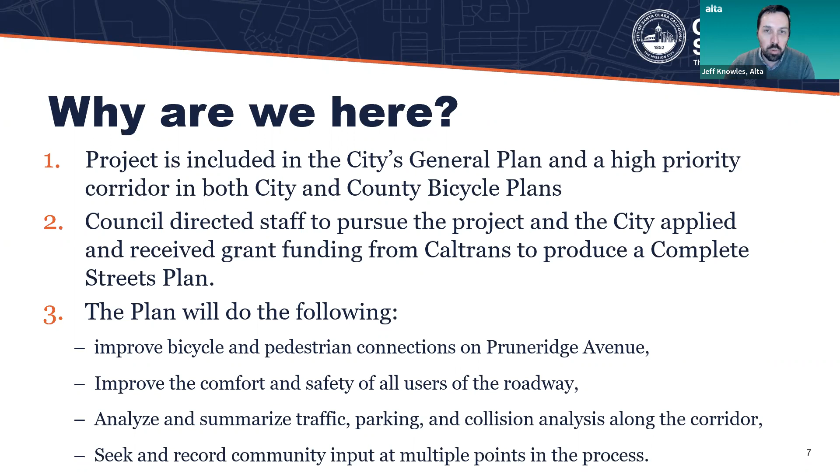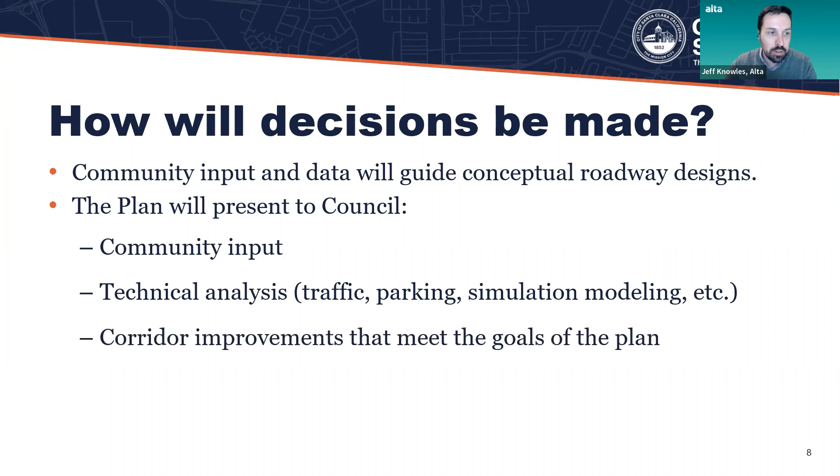We'll be sharing all the technical analysis we're going to share with you today, along with the corridor improvement ideas that help meet the goals of the plan. I think what's most important and clear to understand is that City Council will decide if and how the plan moves forward.

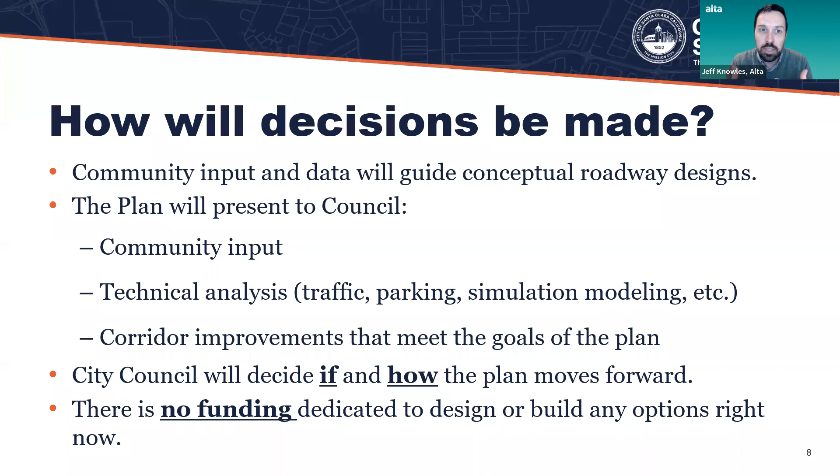To underscore that, there is no funding dedicated to design or build any of these options right now. We're very much at the visioning stage, very early on. There's no money for any construction of these. So we're looking for your input about what the future of Pruneridge could look like. But to reiterate, there's no funding for any of these projects to move forward unless City Council made that a priority and dedicated funding for it.

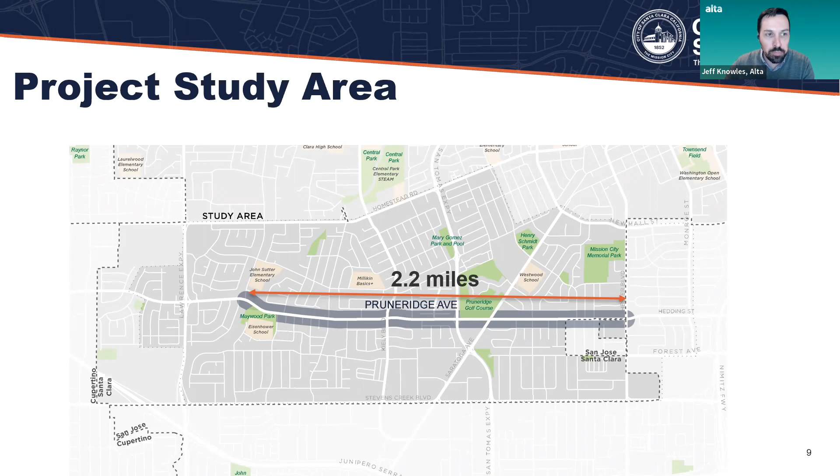So the Pruneridge area - what we're doing is studying a 2.2-mile corridor from Winchester Boulevard, which is your city border with the City of San Jose, all the way to Pomeroy, which is less than a mile from Apple Park, a major employer in the area. And on the east side, you're just 0.3 of a mile from Santana Row, a big retail, shopping, and restaurant district, so you've got good connectivity there.

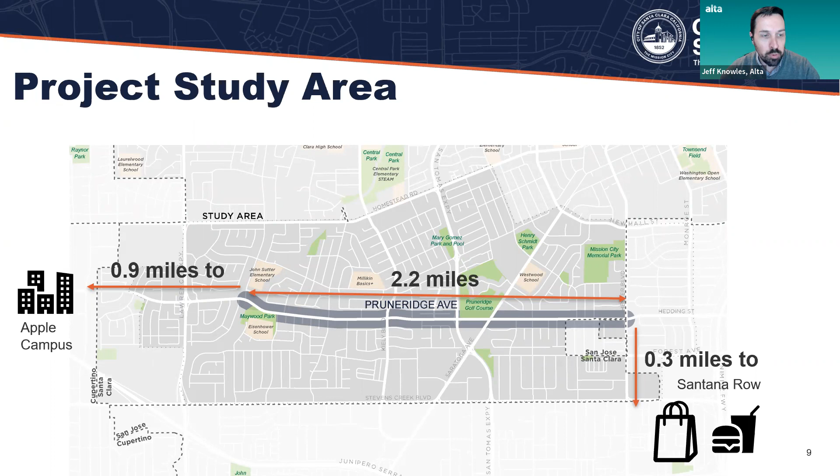It's also the area bounded by where there has already been a road reconstruction. So there are 3 lanes in each direction on Stevens Creek, which is what Pruneridge becomes in San Jose, and then there are 3 lanes on Pruneridge from Pomeroy over to Tantau.

Where are we in the project schedule? This project kicked off last winter. We had 2 rounds of community workshops, where we were gathering information, listening to people's preferences, getting their visions and ideas for the corridor. Then over the spring and summer, we started to put that information into roadway concepts, shared them out with the public, and did 2 more rounds of workshops.

Over the fall and winter, we've revised those roadway concepts based on the input we received, and I'll be ready to share that tonight. We've also looked at pedestrian improvements, which is something we did not look at in detail earlier on, so we've gone back and evaluated opportunities to make it easier to walk. From here, we'll take this input and revise it, putting it into a public draft for council and the public to review again before council makes a decision.

So activities completed to date: that first phase of community engagement included 7,000 postcards going out to everybody within a half-mile of the corridor, holding 2 workshops, having an online survey, and meeting with the Bicycle and Pedestrian Advisory Committee.

We also held 5 stakeholder meetings with businesses and civic organizations around Pruneridge Avenue. We developed our draft corridor concepts, held our second round of community engagement, and analyzed the existing and conceptual corridor analyses to understand the impacts each concept would have on traffic, parking, and congestion. We refined the corridor concepts and presented them first to the BPAC and then to the public last Wednesday night. So what did we hear?

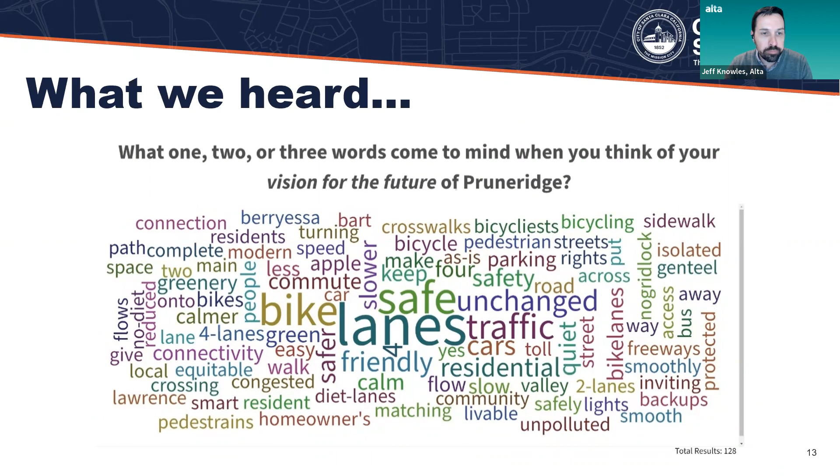Then we said, close your eyes and imagine what Pruneridge could be in the future. If you had a chance to change things, what would you like to see? We asked people to pick 1, 2, or 3 words. We see safe, bike lanes. Some people said unchanged, slower, no gridlock—these are some of the words I'm just pulling out here.

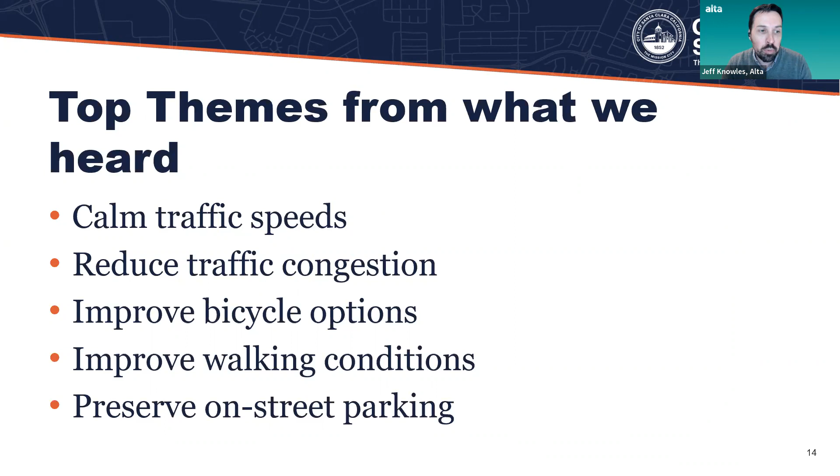All of that boiled down into a couple of themes we heard pretty loud and clear. One is that people wanted to see Pruneridge have slower, calmer traffic speeds. Folks also mentioned a lot of concerns about traffic congestion during the AM and PM peak periods. We heard that people wanted to improve bicycling options and walking conditions, and also heard pretty clearly that people wanted to preserve the on-street parking options.

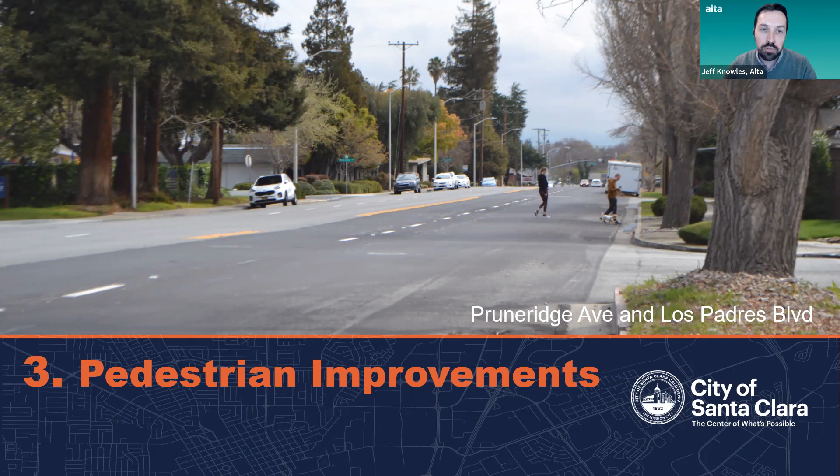All of that informed the work we did in coming up with these ideas, these concepts. I want to start first by talking about the pedestrian improvements. These improvements come directly from the city's pedestrian master plan, which looked comprehensively at where the city could make improvements for crossing the street or walking along streets to get to destinations. So these are the tools we have that come directly from that master plan process.

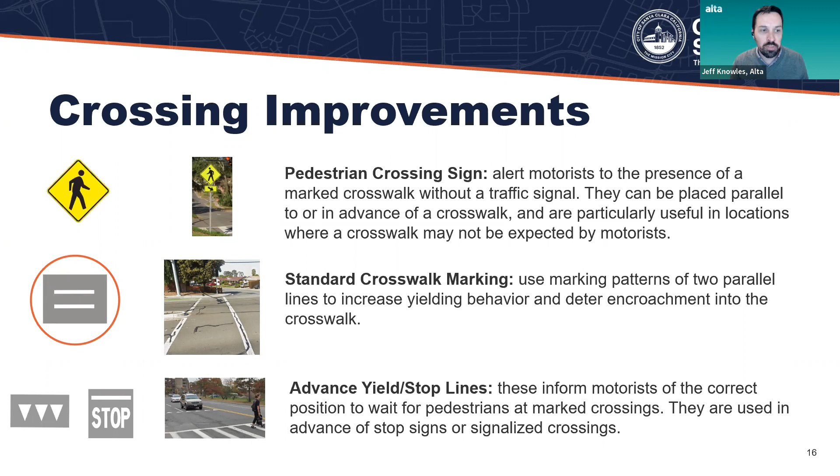We have features and elements like the pedestrian crossing sign to alert motorists where crosswalks are located. We have markings like standard crosswalk markings, the 2 white lines you see here. You have advanced yield lines and stop bars—these advanced yield lines are these triangles. That's just to let drivers know they should not park or stop right on a crosswalk; you want to set back. That gives more visibility for people crossing the street.

We looked at opportunities to improve ADA curb ramps for people who need wheelchairs, walkers, or strollers. We also looked at opportunities to reduce the curb radius—basically making it so cars need to slow down more when making turns. When you have these wide sweeping turns, you can take those at high speeds, which can create more conflict and collisions with people walking. So we've looked for opportunities to tighten that up a little and shorten the crossing distance.

We've looked at opportunities to improve right turn slip lanes. If you think about where those are located, at Saratoga and San Tomas Expressway, that's where you have the right turn slip lane that doesn't have a signal, and you can take those again at pretty high speeds. It becomes a bit of a conflict point for people walking, so there are different designs you can do to slow those down.

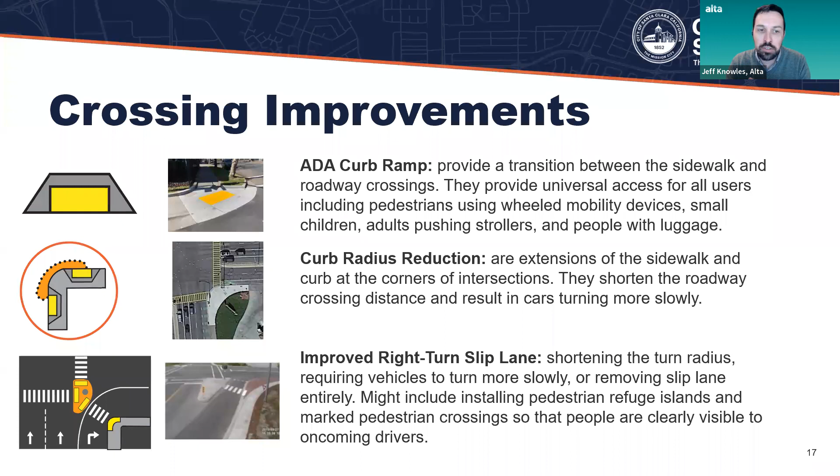Finally, we looked at opportunities to add countdown timers for pedestrians, along with accessible pedestrian signals—devices that communicate walk or don't walk for people with visual impairments. Finally, we looked at opportunities for traffic studies at intersections that might need stop control, stop signs, other signals, or beacons, which would require a little more data than we could collect in this process.

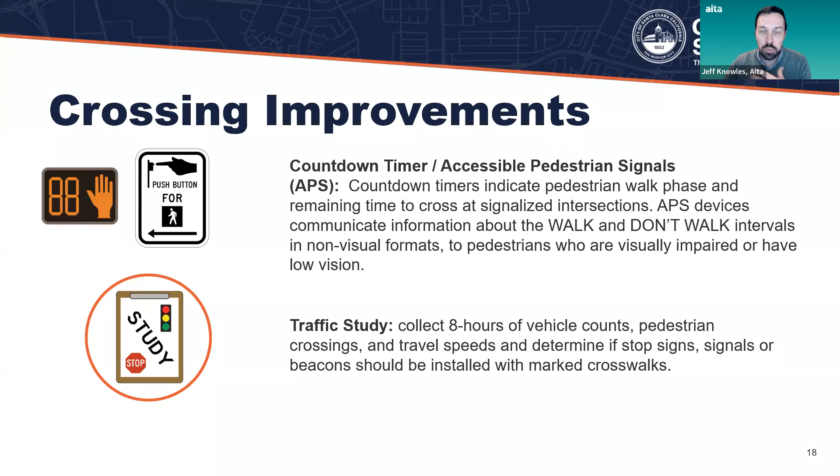So I'm not going to go through every intersection, but I will note we've got ideas for improvements at each of these. The slideshow will be posted on the project website, and we'll also email it out to anybody that registered for this meeting tonight.

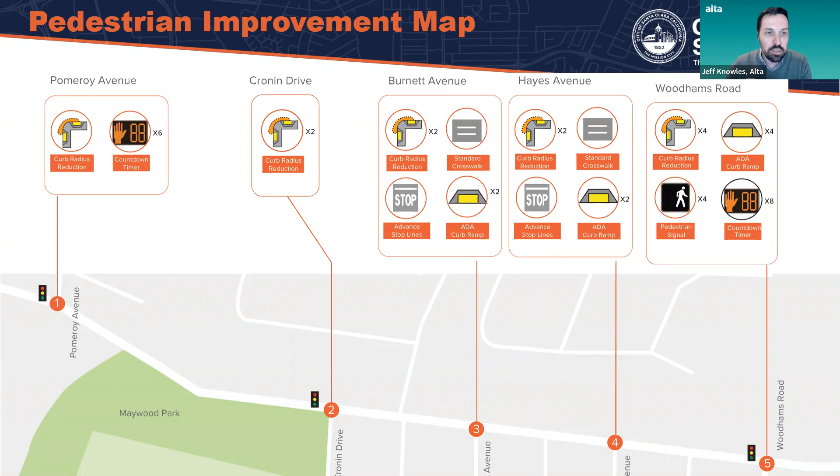So you can see those icons match up with these icons that I've shared with you here, and you can kind of see at each intersection. So at Pomeroy, we're recommending reducing that curb radius and adding a countdown timer on at least one of those legs. We've got these for all the way through Redwood and Cedar Way.

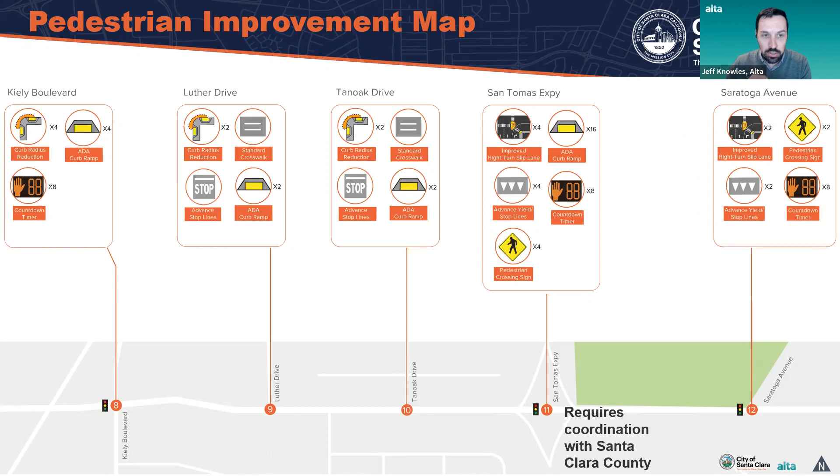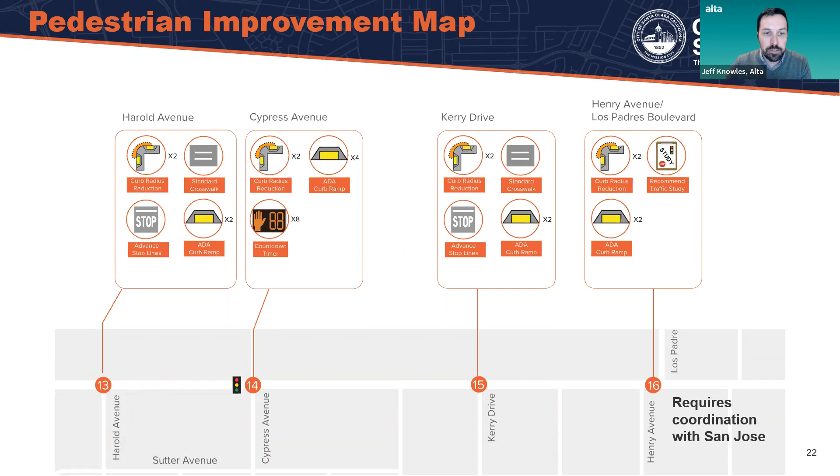We've also noted some that will require more coordination, such as San Tomas Expressway, which is not really under the control of the city, it's managed by the county. So you have to work with Santa Clara County for any changes there. There also are portions of this corridor that are within the city of San Jose's jurisdiction on the south side of Pruneridge Avenue, starting around Henry Avenue all the way to Winchester. So you can see those here as well.

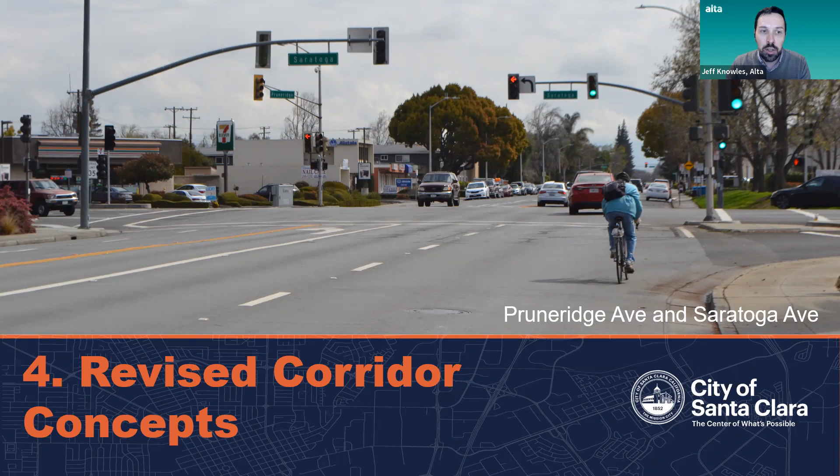In terms of the corridor concepts, if you're new to this project, I'm going to go through those in a little more detail. We've presented these previously to the public and heard some clear concerns about what we presented, and we've identified some revisions to those.

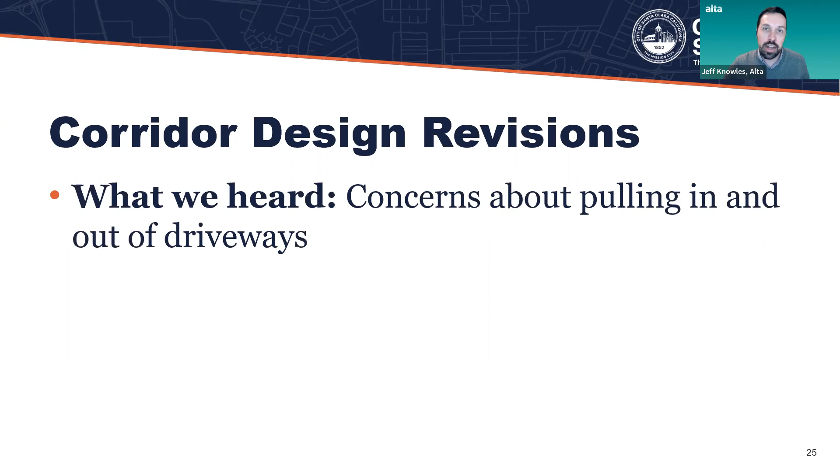So one thing we heard in the last round was concerns from residents who live directly on Pruneridge about getting in and out of driveways. So we've come up with driveway sightline buffers - I'll point those out in the concepts in a second. I also heard it's unclear where trash receptacles should be located, so we've identified where those could be picked up, where you could store your trash receptacles on pickup days.

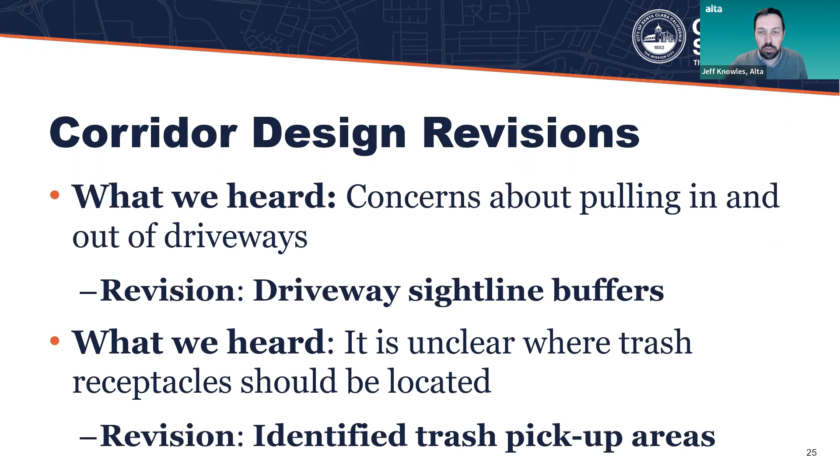The first concept that we shared previously is this 4-lane option. So a couple things to point out here: instead of those 12-foot travel lanes, we would reduce those and narrow them down to 11 feet for the inside lanes and 10 feet for the outside lanes. That has a benefit of helping calm traffic and slow it down. Then to fit in a buffered bicycle lane, which you can see here is 5 feet wide with a 2-foot painted buffer, this concept 1 would require removing parking on one side of the street. And we're not here to say which side of the street, but I'll get into more detailed analysis in a minute here about what that would mean in terms of impacts.

Some other things to point out with these concepts is, as you can see in blue, the curb radius reduction or the curb extensions. That provides additional visibility for people crossing the street and slows down traffic from making those turns so they can do it at a safer speed.

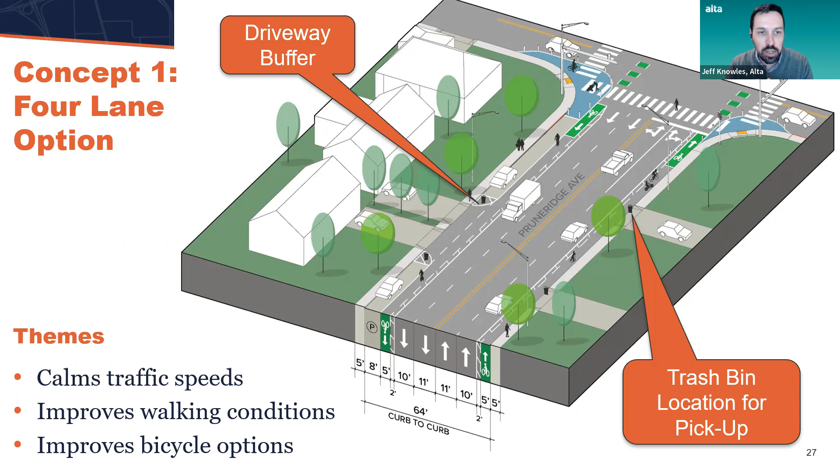In terms of new features, you can see here at the corners, at driveway corners, we've added driveway buffers, so it's painted space where people would not park. This gives a little more visibility for people getting in and out of the driveways. These also provide opportunities for people to put their trash bins out on trash pickup days in those sightline buffer areas. And on the street side that would lose parking, those would need to stay on the sidewalks.

The second option is called the 2-lane option. This would take your 2 travel lanes in each direction and take it down to 1 travel lane in each direction and add a 2-way center turn lane down the middle. The benefit of this is that people getting in and out of their driveways, instead of having to turn left across 2 lanes of traffic and try and find the gap, this allows them to move out of the traffic, wait for that gap, and cross only 1 lane in the opposing direction. So it's a safer orientation.

Also, the lanes would be narrowed down to 11 feet and 10 feet for that center turn lane, so there's some traffic calming, speed calming built into the design. The feature of this would also be preserving on-street parking on each side of the street and getting in those buffers. There would be a little bit more buffer space, 5 feet, and then the 3-foot painted buffer. And in terms of the intersections, same as before, there'd be the curb radius reduction to make it easier for people that are walking to cross the street. On both sides of the street, you have the trash bin locations for pickup within those driveway buffer areas.

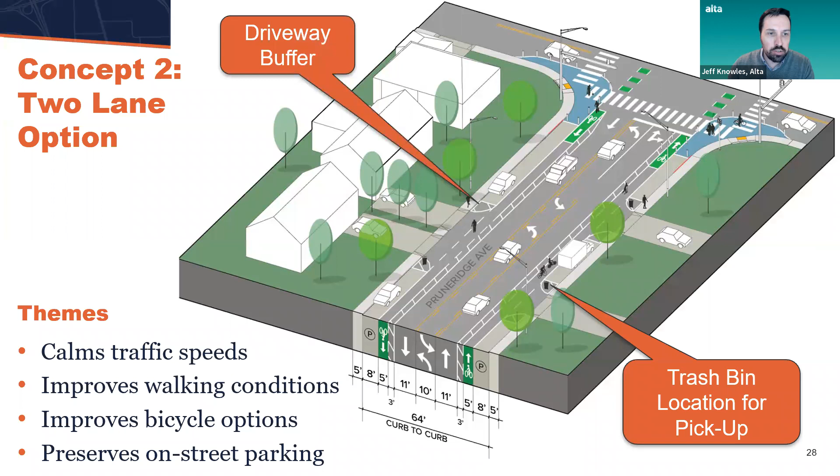And then the third concept is what we've called the parking protected option. It's very similar to concept 2 that I just showed, but you're flipping the bike lane and the parking lane. So now you have the sidewalk, then the bicycle lane, a 3-foot painted buffer, and then you have your parked cars floating in a parking lane before you get to the travel lanes. Same dimensions as before in terms of the travel lanes, and a little bit more space at the intersections here.

I will mention that in addition to the parked cars in that buffer space, not blocking the driveways, there would be some sort of vertical element, and we haven't decided what that would be. That would be later stages of design to figure out, but it could be bollards, curb stops, a planted median - a lot of different features and looks and feels. So there would be additional physical barrier. This concept appeals most to young kids, novices, maybe older folks bicycling, because it gets that extra protection between them and high-speed motor vehicles.

And again, the driveway buffer, you can see that here, making it easier for people to get in and out of driveways, and also providing opportunities for storing the trash bins for pickup.

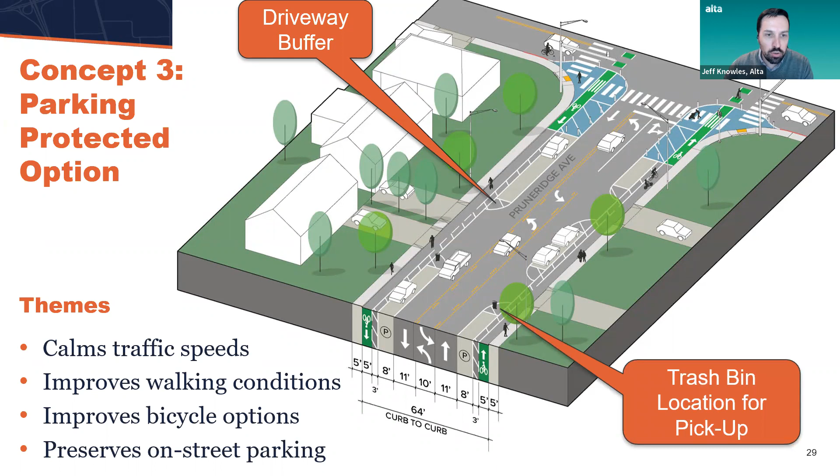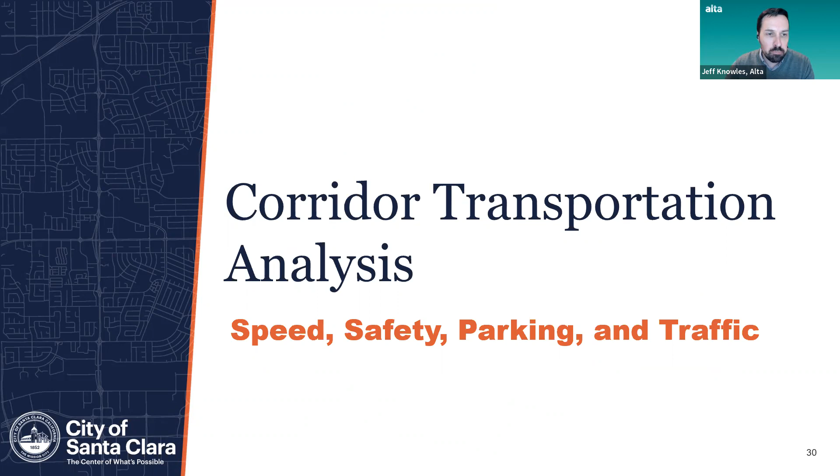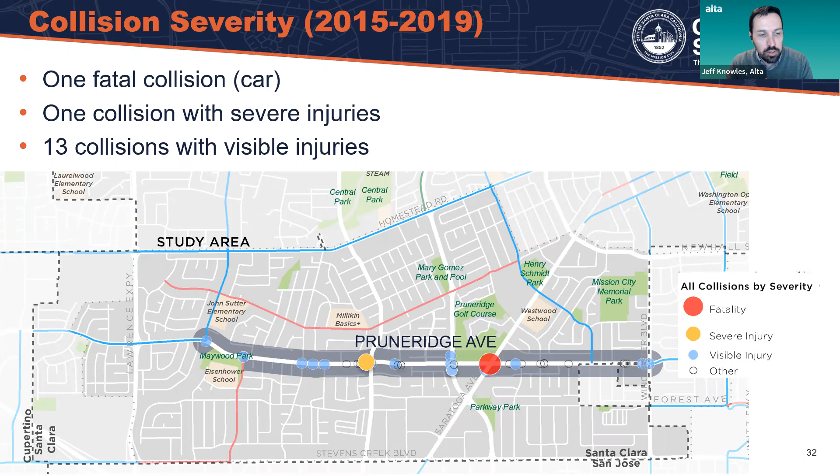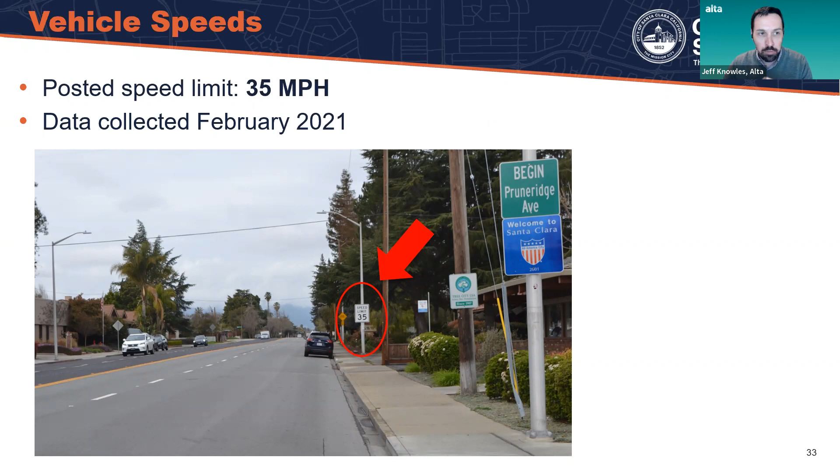Posted speed limit is 35 miles per hour. We collected speed survey information in February of 2021. And what I'll point out is that in February 2021, there was a lockdown in place, so the volumes, the number of people out on the roads, were down, and nationally speeds went up - with fewer cars out there obstructing you, you can travel at higher rates. And we definitely saw that. So these numbers may be more than a typical day after COVID. I just want to make sure that's clear when I report this information.

That being said, the numbers we collected support what we heard from the public before, that people are moving at higher rates of speed, certainly during non-AM and PM peak hours. 44% of drivers were exceeding the speed limit between Pomeroy and Kiely. They weren't going too much further than that - 85% of drivers were below 39 miles per hour. So yes, speeding, but we're not seeing incredibly high rates. There aren't a lot of people going 60 on Pruneridge, but even still, we know that 35 miles per hour can be deadly and lead to severe collisions.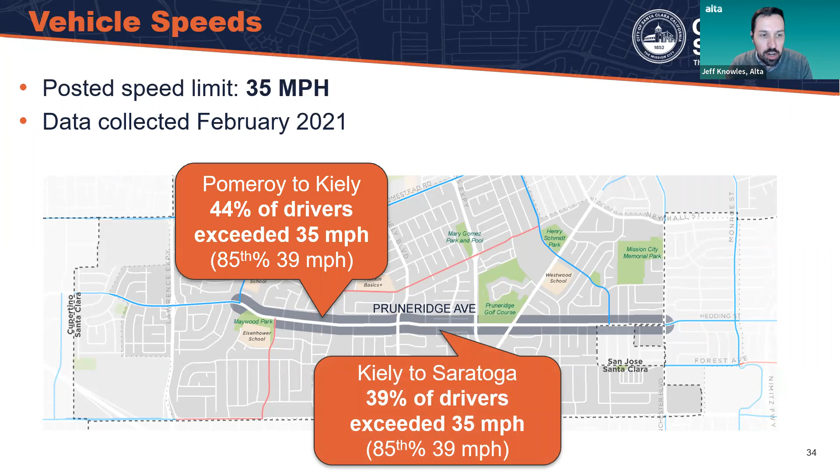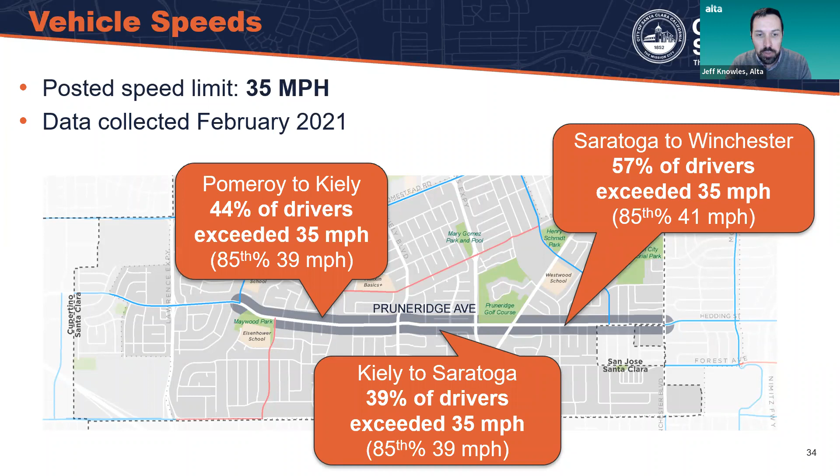39% of drivers exceeded 35 miles per hour with a speed limit between Kiely and Saratoga. Still, the majority are below 40 miles per hour. The area where we see the highest rates of speeding is between Saratoga and Winchester - 57% of drivers, when we collected information over several days, were going above the speed limit, and the majority were below 41 miles per hour. This, I think, is attributable to the fact that there are very few stops or signals between Saratoga and Winchester. So the way the road is designed feels like you should travel at higher rates of speed.

So what does this information tell us about each of the concepts? The first, no-build option, keeping the street as it is, would not have any potential collision reduction or speed reduction factors. If you went with the 4-lane option, which has lane narrowing, we don't have enough research nationally to talk about what that would do for collision reduction, but we do know that potential speed reduction would go down between 1 and 6 miles per hour just by narrowing the travel lanes.

If you go with concept 2, the 2-lane option, you get the lane narrowing plus reconfiguring the roadway. From the Federal Highway Administration, which has done extensive national study of this over the last 25 years, they've reported those streets that do this reconfiguration see between a 19 and 47% crash reduction, along with the narrowing travel lanes getting 3 to 6 miles per hour slower.

On top of that, the parking protected option, concept 3, you get the lane narrowing, the reconfiguration, and the bicycle protection. That bicycle protection we're not seeing yet reported on - it's a relatively new design, and we've not seen enough national research to report back on the collision reduction for bicyclists, but you get the same benefits as concept 2.

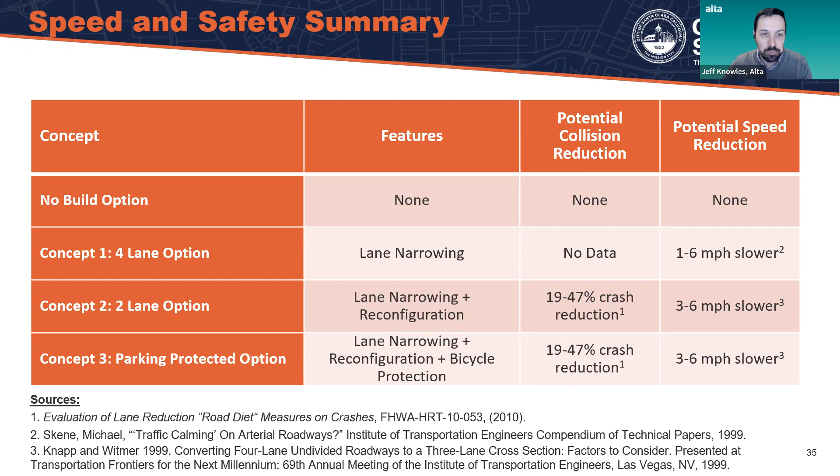We looked also at what road reconfiguration did in terms of collisions on either side of Pruneridge Avenue. First we looked at the road reconfiguration from Tantau to Pomeroy. This is what the street looked like before - very similar, almost exactly identical to our study corridor. After the road reconfiguration went in, the city saw a 15% collision reduction.

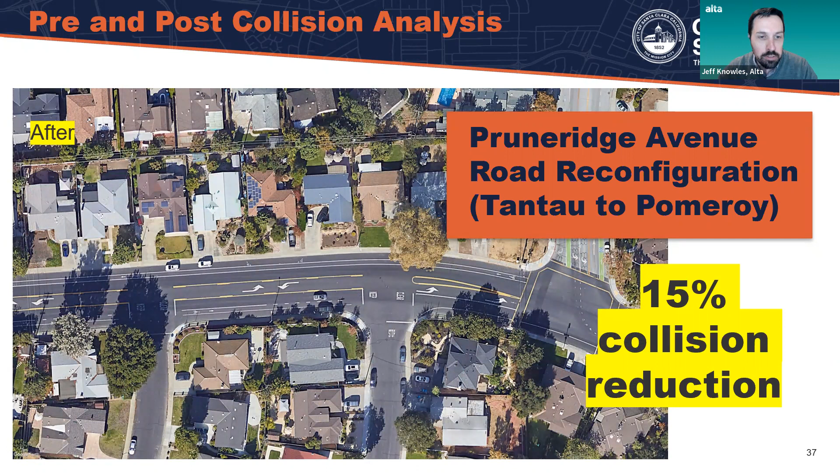On West Hedding in the city of San Jose, the north-south street here that's not labeled as Winchester Boulevard - at the very beginning of our corridor study, this is how it looked before: again, very identical, 2 lanes in each direction. After the reconfiguration, the city of San Jose reported a 33% collision reduction in the years before versus the same period after.

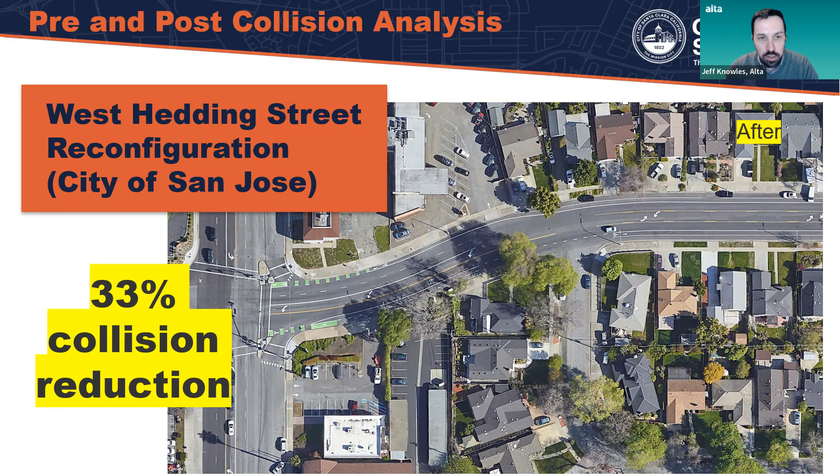Parking analysis. So we did a really exhaustive parking analysis. We took parking counts on both sides of Pruneridge Avenue from and including Pomeroy all the way to and including Winchester. We did these in March of 2021, during lockdown during COVID, so we could probably assume that this is the highest demand for on-street parking when people were not traveling to jobs. We took parking counts at multiple times during the day.

We did block-long counts on all of the side streets on both sides of Pruneridge, conducted during 3 weekdays. Each of those weekdays we conducted it at 7 to 9 a.m., then again at 11 to 2 p.m., and we did counts between 2 a.m. and 4 a.m. to figure out the overnight needs. We came back on a Saturday and did it also in 2 time periods, between 11 and 2 and 5 and 8. So what the data I'm presenting here is the average utilization across those time periods.

We have detailed maps for each of those time periods if the staff or the public would like to see them as well. So really what this utilization understanding helps us with is concept 1, which would require the removal of on-street parking. From this information you can see here that there are 220 available parking spaces on the north side of Pruneridge. What we observed on average is that 43 cars are using those spaces.

And so you have a utilization rate of 19%. We have more spaces available on the south side, 233, with an average of 38 observed, so 16%. So on average, about 18%, or 8 out of 10 parking spaces available during a period which we think would have the highest demand for parking.

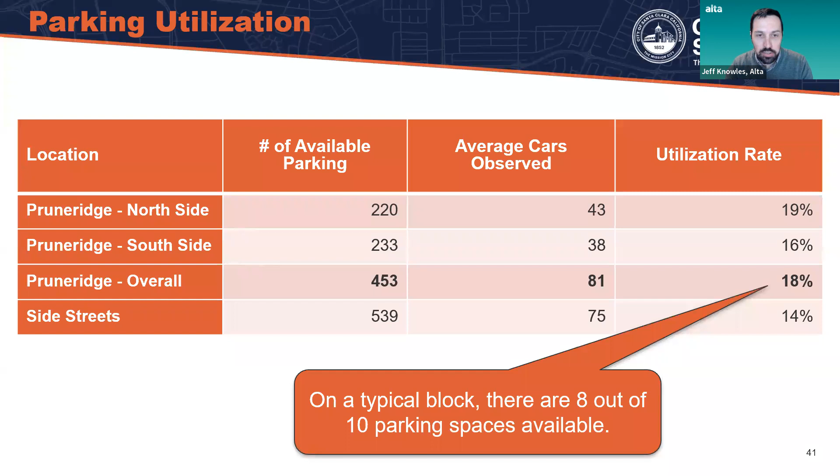Shown graphically here in the navy, this is blocks on side streets as well as on either side of Pruneridge that have greater than 50% of the available on-street parking available. The lighter blue is between 30 and 50%, yellow is 15 to 30%, and anything in red is less than 15%, or heavily parked up with not available parking spaces.

So you can see here on average what it looks like. Taking out some example blocks: Radcliffe to Woodhams, 5 out of 36 available spots are used. The area where we see a little bit more use is Saratoga to Cypress on the north side, 17 out of 28 spaces used, but still available on the side streets and across the street. Then this area from Saratoga to Harold, in front of the Sportsman Lounge or the laundromat, 12 out of 15 spaces are used here.

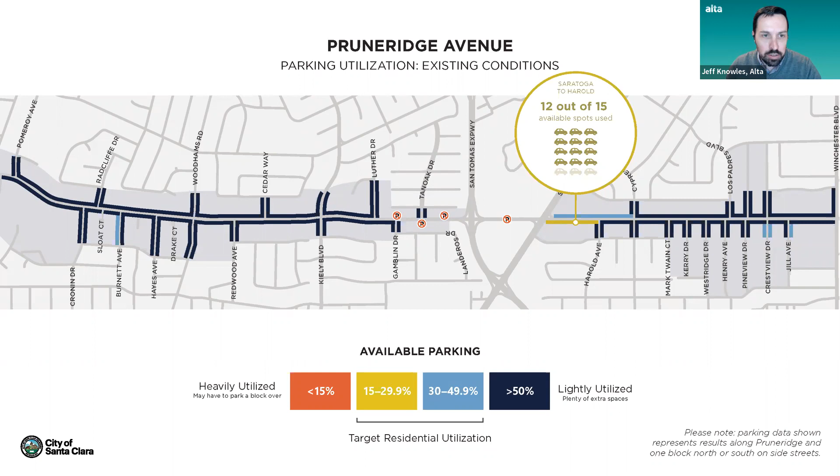We did not count whether people were fully utilizing the off-street parking lots that are here, and then across the street, the 7-Eleven and the shops across the street. So what would happen if parking were removed on the north side of the street and consolidated?

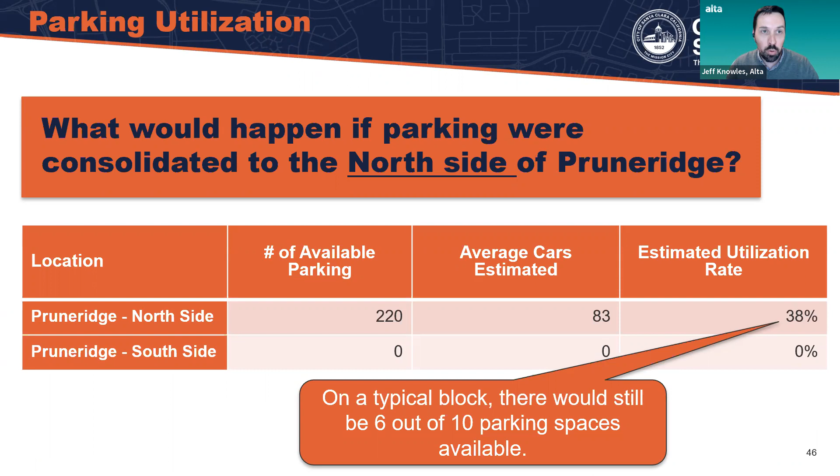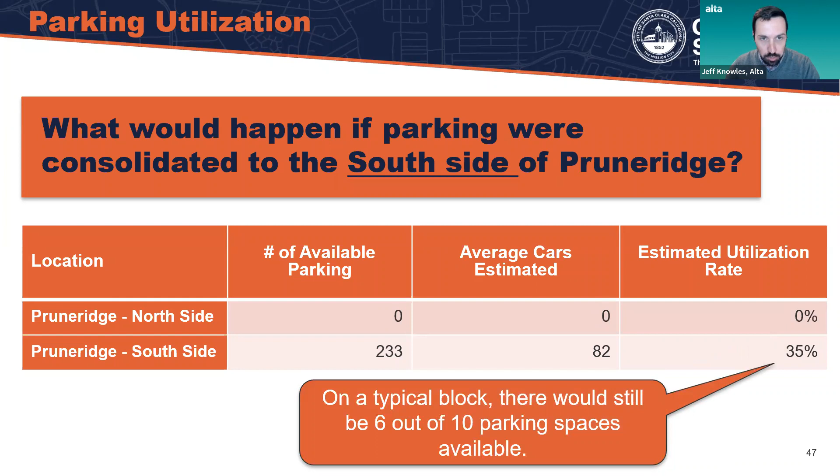On a typical block, there would still be 6 out of 10 parking spaces available, assuming that everybody would park across the street instead of using the side streets, which could also accommodate all of the available parking needs. On the south side, again, 6 out of 10, or 35% utilization. So there'd still be plenty of parking spaces available if the city pursued Concept 1.

Traffic analysis. I'm going to get into a little bit more information here. We started our traffic analysis by collecting turning movements, or intersection counts, for bicycles, pedestrians, and vehicles at 25 locations. We collected all of that on a midweek day in February of 2021, so during COVID. I'll get into a little bit more about how we corrected for that, because volumes were lower than typical, and we've factored that in.

Intersections are evaluated using the city's transportation analysis policy, using level of service, or LOS, which evaluates the operations or congestion people would face at different intersections. They're scored A through F. Don't think of this like grade school, where A is what we should all strive for and F means you flunked. An A could mean the street is overbuilt and cars are going at very high speeds. In its general plan, the city sets out goals for acceptable operational values, and those are between an A and a D. So if you get an A, B, C, or D, you're meeting the city's goals. They also make exceptions for San Tomas Expressway, where E is also acceptable on these major expressways. F is unacceptable anywhere, and E is not meeting the goals on city streets.

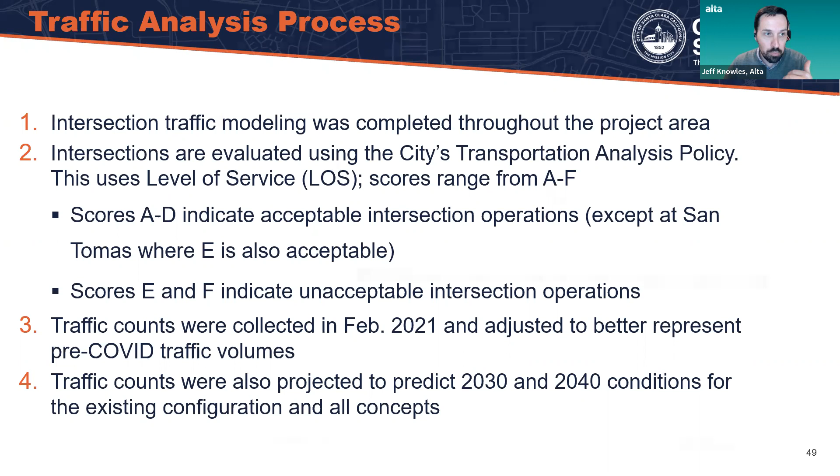I mentioned the 25 study intersections. 12 of them are along Pruneridge, 5 are on Forbes, 5 on Homestead, and 3 on Mauricia.

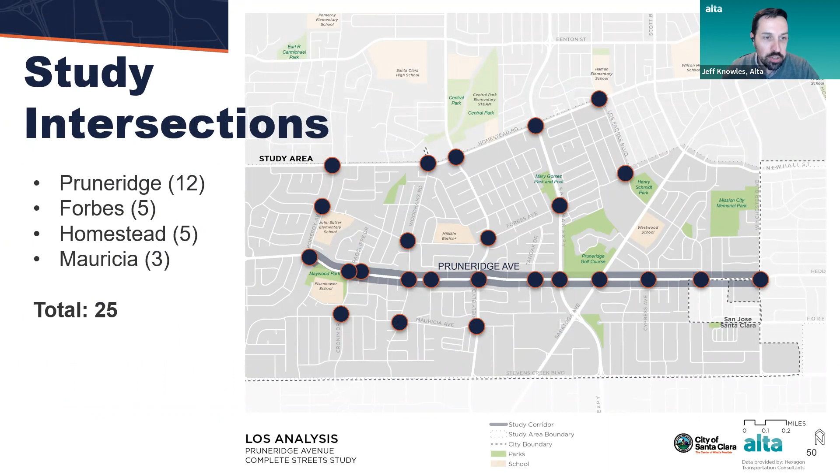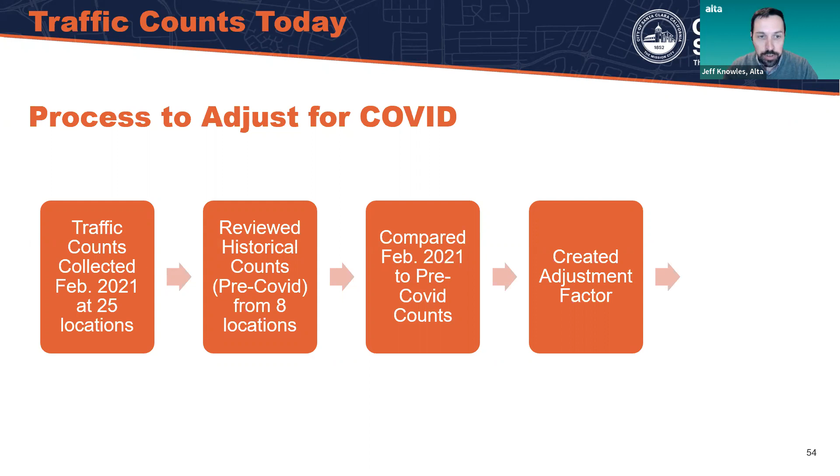We started by collecting those counts during COVID at 25 locations, and then we reviewed historical counts. We have 8 locations, 4 of them on Pruneridge, from before COVID, in the years right before, 2018 and 2019, so pretty fresh information about driving volumes along Pruneridge. We compared the counts we took to the counts we had and created an adjustment factor, looking at how many fewer cars are traveling compared to pre-COVID. That's the average we used to bump up all of our count numbers. I'll show you what that looks like here.

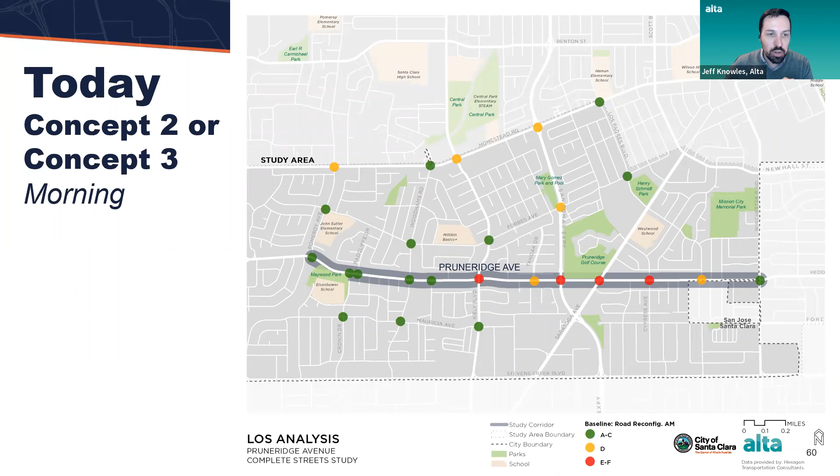With concepts 2 and 3, you can see how those shift down and create issues at Cypress, at Saratoga, at San Tomas Expressway as before, and at Kiely.

In the evening, a very similar situation. With concepts 2 and 3, you can see issues at San Tomas, at Tan Oak, and at Kiely.

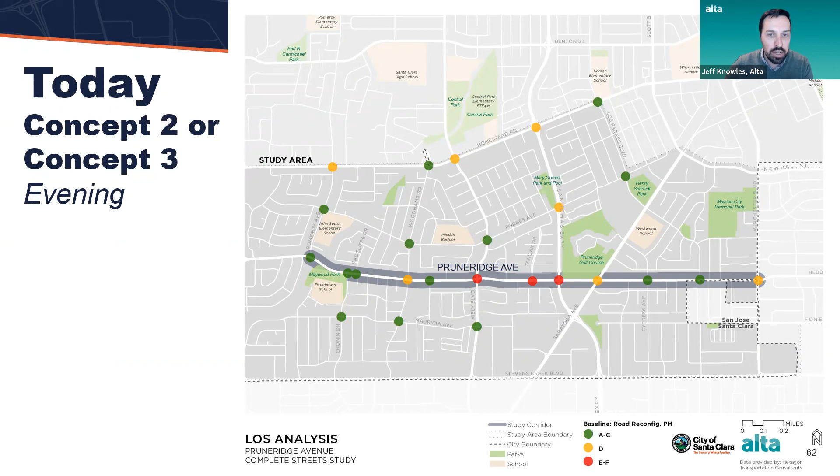In the year 2030, we expect 18% higher traffic volumes than today. The current no-build option, or concept 1, which are identical in terms of traffic impacts of doing nothing, would see 3 intersections not meeting the goals: San Tomas Expressway, Pomeroy and Homestead, and Kiely and Homestead. That could be due to other factors at play, which the city will look at in terms of ways to mitigate or reduce those impacts.

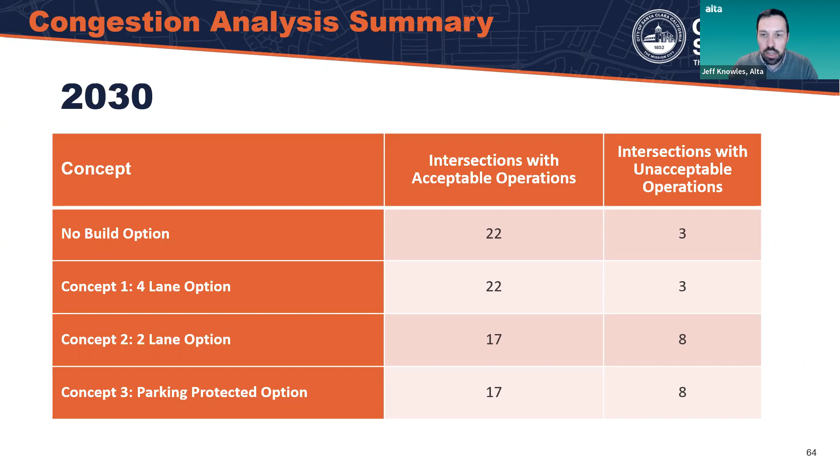In addition, you'd get a couple more intersections not meeting the goals on concepts 2 and 3. Those would include, in addition to San Tomas and Pruneridge, Pomeroy and Homestead, and Kiely and Homestead, you'd also add Kiely and Pruneridge, Tanoak and Pruneridge, Saratoga and Pruneridge, Cypress and Pruneridge, and San Tomas and Forbes not meeting the goals.

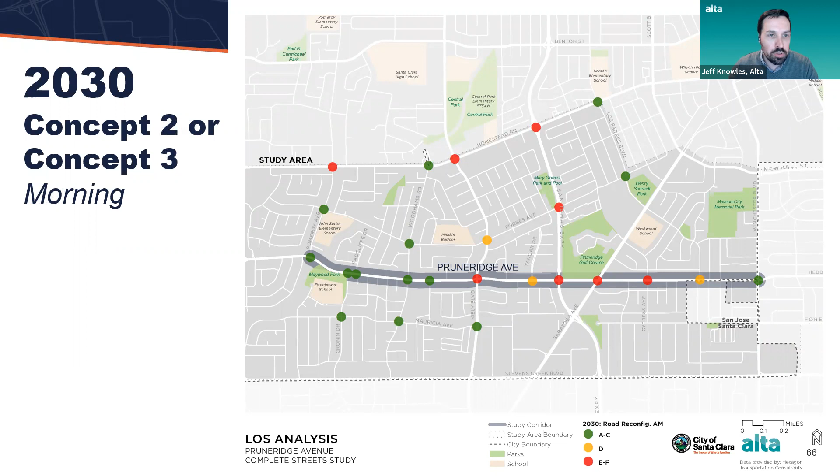So again, this is looking at 2030 with doing nothing, or concept 1, in the morning. Then this is the morning with concepts 2 or 3 — you can see those intersections not meeting the city's goals for level of service. And then the evening rush hour, these are the intersections not meeting the goals, along with those for concepts 2 and 3 that I just mentioned.

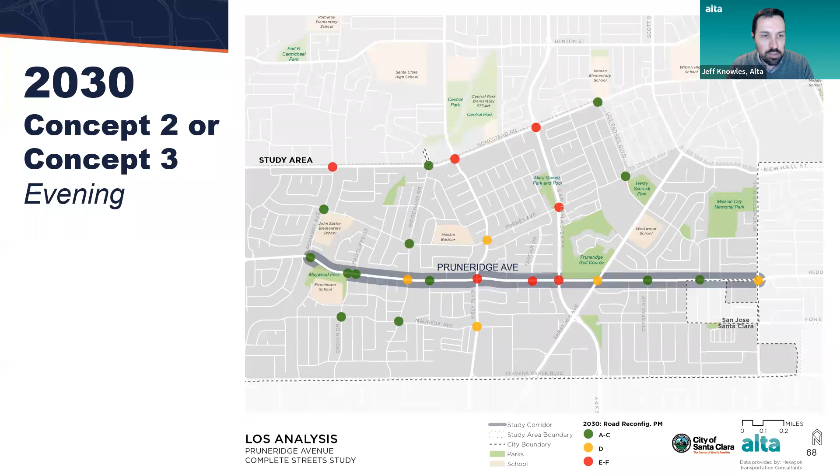So these are during the rush hours. Certainly during most times of the day you would not see these same impacts or effects, but we wanted to make sure that during the most congested hours we were giving you information about what that would mean.

We also looked at travel time. In the morning, it takes 8.2 minutes in the busiest direction during rush hour, and that roadway got a level of service scoring of D, meeting acceptable time periods. With the road reconfiguration across the whole corridor, concepts 2 and 3, you would see that increase by 105% to 16.8 minutes to travel the corridor during rush hour, which would be a level of service F.

In the evening eastbound, currently it takes 10.8 minutes with a level of service of E. That would increase to 14.7 minutes, a 37% increase, which also brings it down to a level F. These are all for 2030.

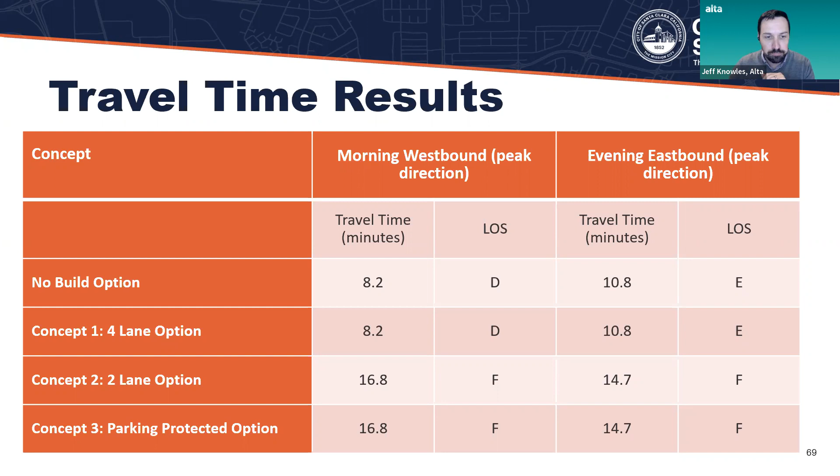We also looked at neighborhood traffic diversion. We heard loud and clear from residents at the first two rounds of workshops that they were really worried about the level of diversion from Pruneridge onto side streets. So we modeled that for the year 2030 to figure out what would happen in terms of traffic, running all the different permutations a vehicle could take to reach their destinations, accounting for service delays that might be impacted.

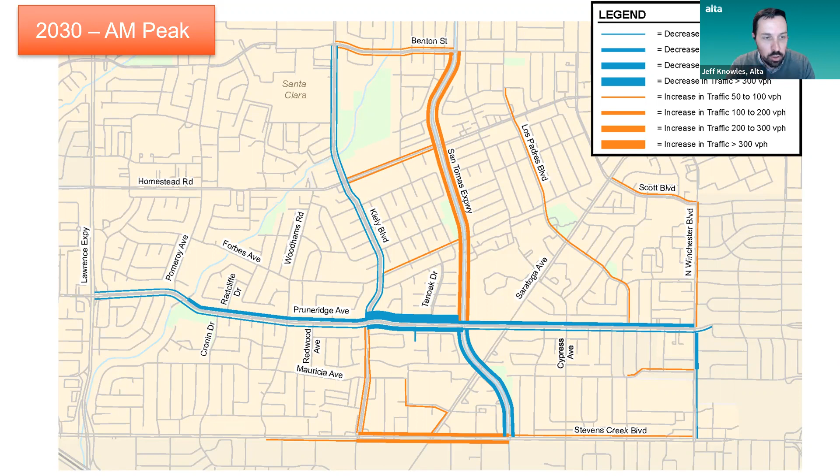So we think it would be almost imperceptible, though there could be some small amount of cut-through. In the evening, very similar — we see a little bit more activity on Los Padres Boulevard. It's certainly not without some diversion, but again the majority would use Stevens Creek, San Tomas Expressway, or stay on Winchester or Los Padres, with those areas seeing between 50 and 100 additional diverted vehicles.

So in summary, we looked at 3 intersections that had a poor level of service for options 1, or no build, and option 1, 8 for concept 2 or 3. An average time to travel the corridor, so AM and PM together, is 9.5 minutes for your current configuration, and then 15 minutes and 45 seconds for concepts 2 and 3.

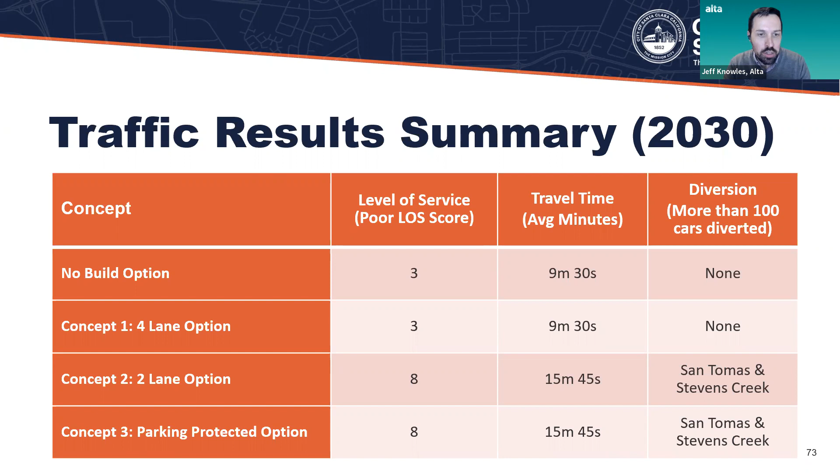In terms of diversion, more than 100 cars diverted onto side streets. You wouldn't get any on the no build or concept 1, and then you'd have more than 100 on San Tomas and Stevens Creek.

We also looked at vehicle miles traveled, what this would do to potentially decrease or increase more people driving. There would be no change, of course, for no build and concept 1. With the new ways people might use to get to their final destinations, we modeled a very modest 0.5% reduction in vehicle miles traveled. Just wanted to share that.

These numbers do not account for any mode shift from people driving to bicycling or walking for trip purposes. In order to do that, we'd have to look more broadly than those 25 intersections and think about it at a more multi-municipal or regional level to factor those in.

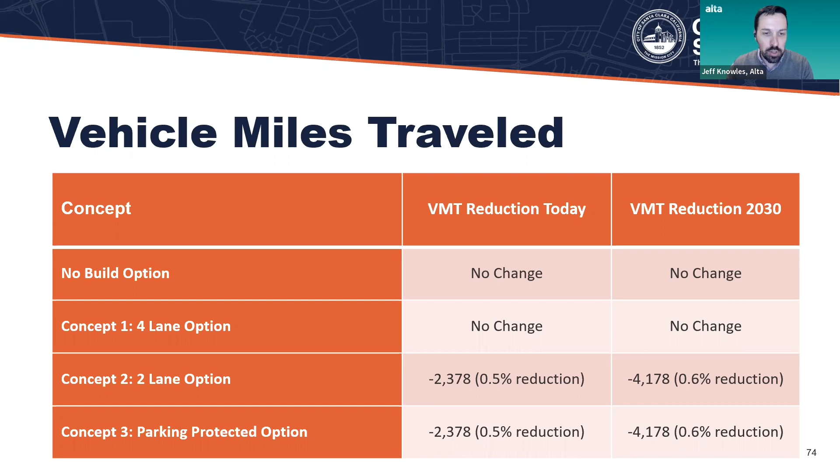So briefly in summary, and then we're going to get to Q&A where we can get your feedback and get your questions answered. Please use the Q&A window if you've got questions, you want to start to fire those away. But in summary, I wanted to think back through some of the goals that we heard from the public in our first couple rounds: reducing speeds and improving safety.

Which options do that? You get that with the 4-lane option, the 2-lane option, and the parking protected option, by either narrowing the travel lane or reconfiguring the roadway to make it safer.

Preserving on-street parking: you get that with the no build option, and you get that with options 2 and 3. There would be some parking removal for those sight buffers, those driveway buffers, but again, we're talking maybe a quarter length of a car, or half a car length, at those driveways.

Which option would minimize additional congestion? Unfortunately, none of these options reduce congestion, but the ones that minimize that additional congestion, you get that with no build or concept 1. Which are the options that improve walking or bicycling? Obviously the ones that improve ability to cross the street, to walk along Pruneridge Avenue, or to have better bike facilities. Those are options 1, 2, or 3.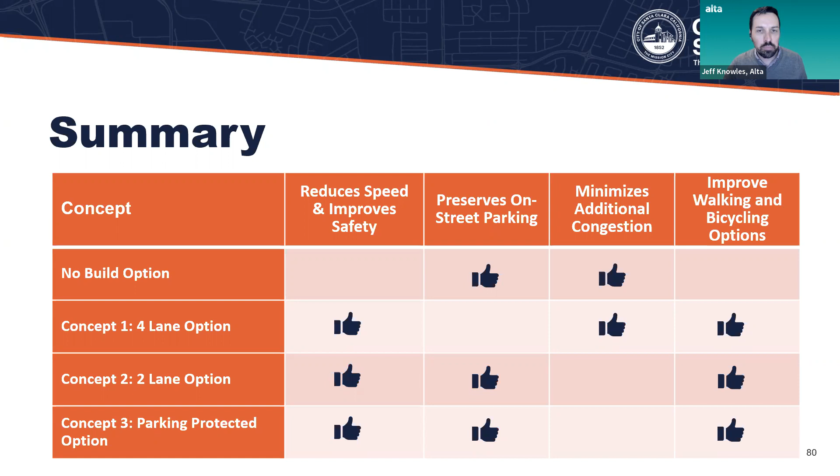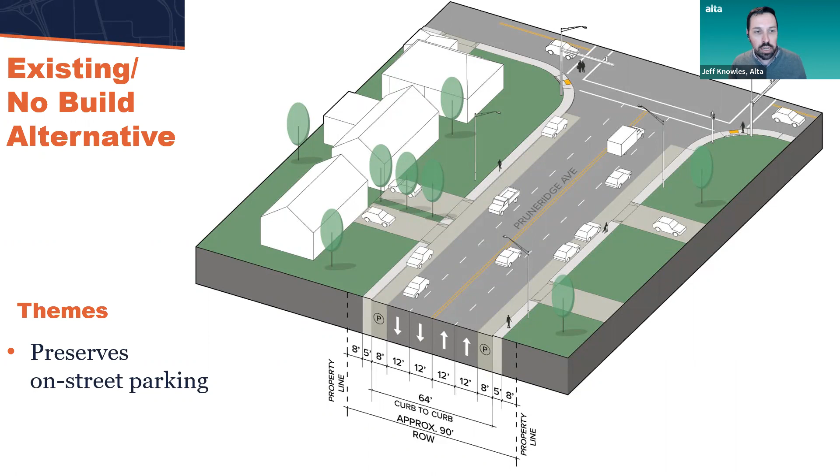So we're going to get to our last poll to keep it interactive here. We're going to ask people to give us feedback about which concept they prefer. Just to jog your memory again, this is the existing no build option: 2 lanes of traffic in either direction, parking on each side of the street.

Concept 1 is the 4-lane option. This would require removing parking on one side of the street, but you get to retain those 4 travel lanes, and there'd be limited impacts to travel congestion.

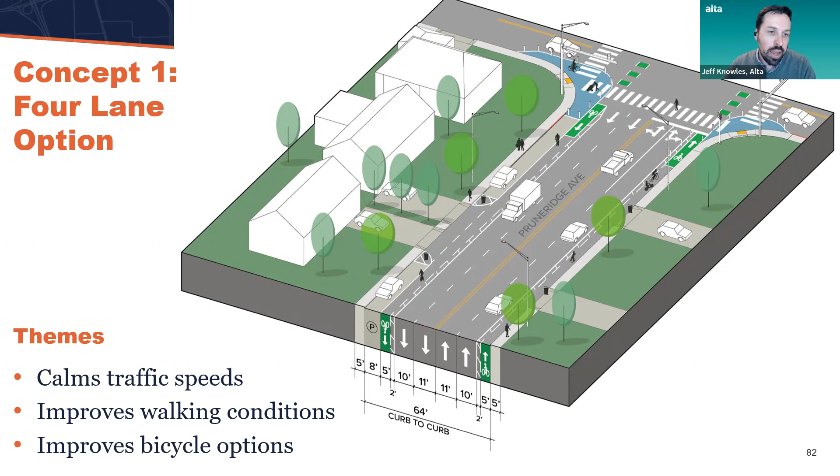Concept 2 is your 2-lane option. Your buffered bike lanes fit in here, and you preserve parking. Concept 3 is your parking protected option, with more comfort for people in the bicycle lane, with the same impacts and benefits that I mentioned before for concept 2.

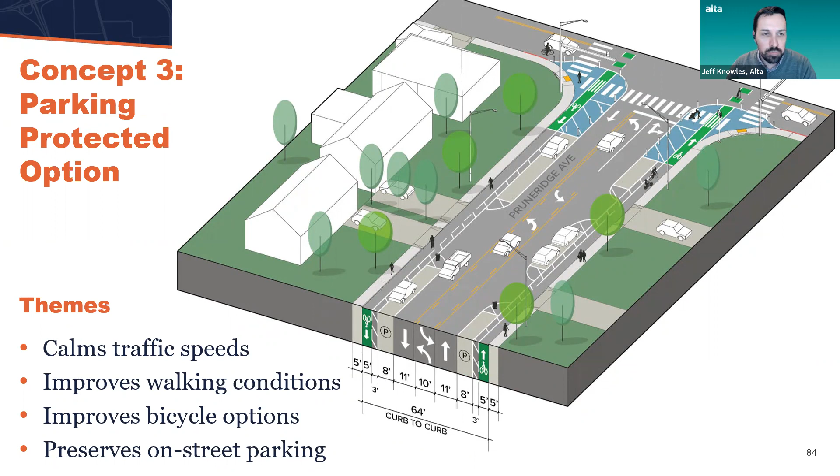So with that, let's go ahead and have my colleague John launch our 3rd and final poll. In this, I want you to rank the concepts in order of your preference. If the city were to think about implementing any of these, which ones would you want in order of your preference? Your first choice is the one you want as your most favorable preference, and 4th is the one you like the least. So rank these in 1, 2, 3, or 4 order.